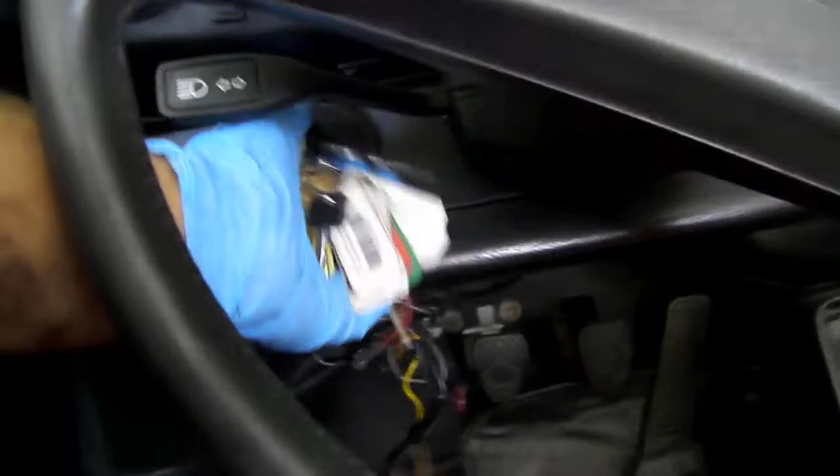So first things first, I'll show you exactly what the issue is in this car. So you go over here, go to the key in the ignition, you turn it, fuel pump, everything comes on, nothing. Again, nothing whatsoever. The starter is not clicking, the starter is not turning, there's nothing going on at all.

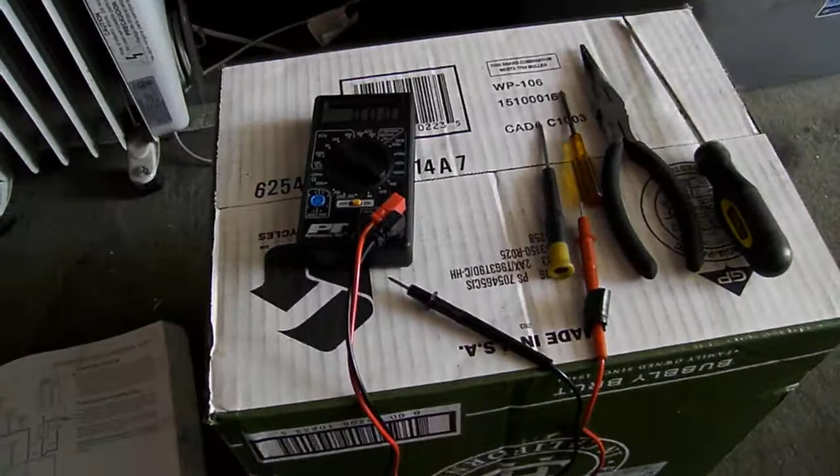So the first step is going over to my little workbench that I created out of a wine box. Go to some basic tools here. Most important one for this job is a multimeter. You could pick one of these up for 20 or 30 bucks at your local auto parts store. Doesn't need to be too fancy. Assortment of screwdrivers, just a few flatheads, pliers in case you need to test the ignition switch or whatever, just for ease. Get an extra strong finger in there.

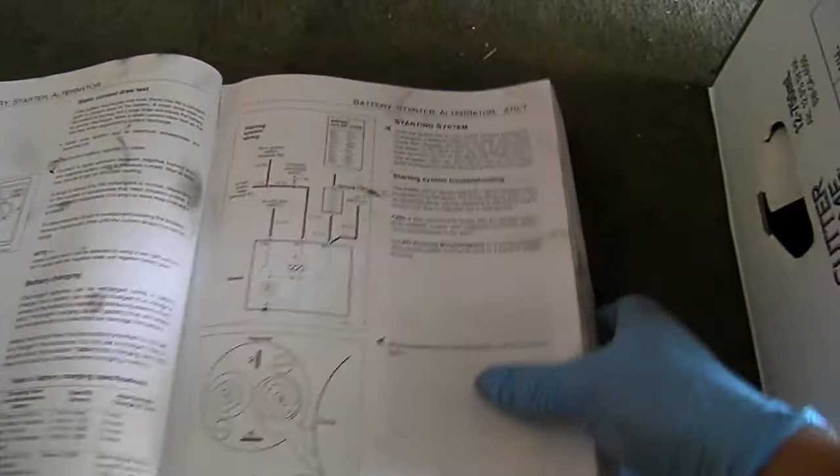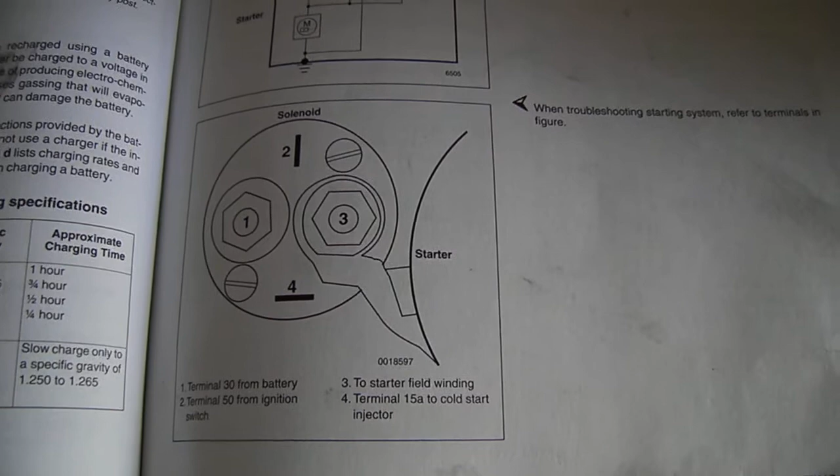And of course, if you do have an older Porsche, the Bentley 911 SC repair manual, which you can just get on eBay. Pretty straightforward. The battery, charging system, starter, it's all in section 270. This is specifically on page 270-7. You can see a schematic of the wiring system here. These are the terminal locations on the starter. Super straightforward, super easy, super basic.

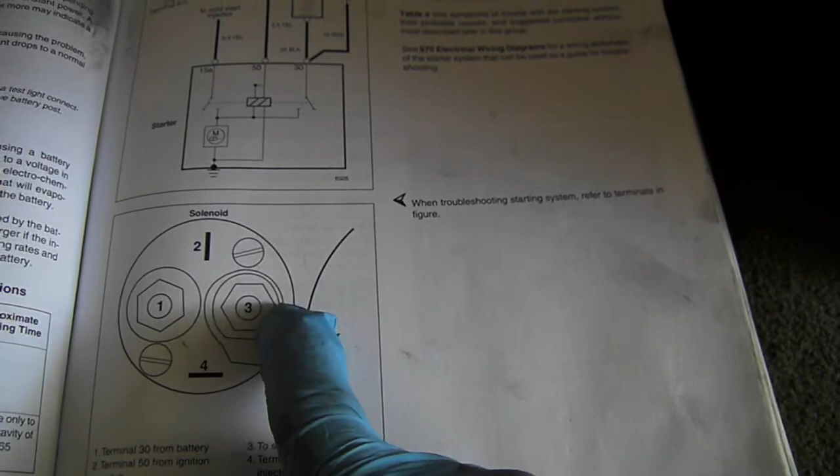Number one, this is as if you're actually looking up at the starter from underneath the car. Number one is your power. You're gonna have power full time there, or you should have. Number 3, next big one at your 3 o'clock position. That one is your starter winding. I don't believe that there are any wires connected onto here. That just transmits power from the solenoid to the starter, makes it turn and start the car.

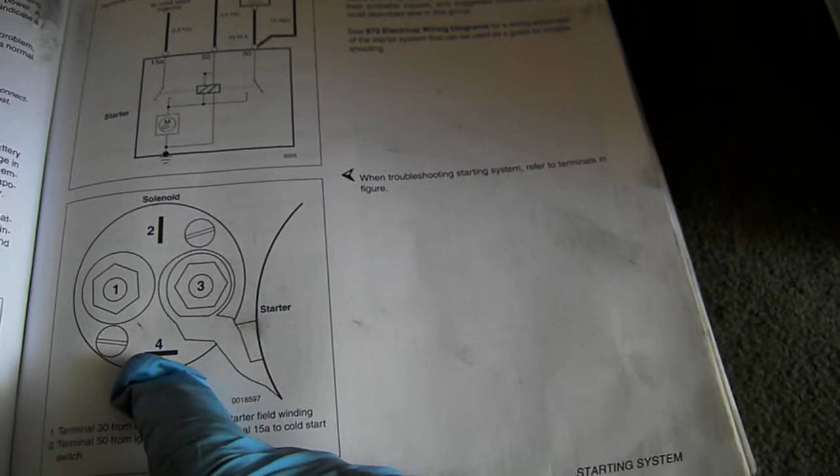Number 4 is for the cold start valve. The car should be able to start without that, but it just aids in opening up the cold start valve for, I believe it's additional fuel to go into the combustion chamber when the car is cold.

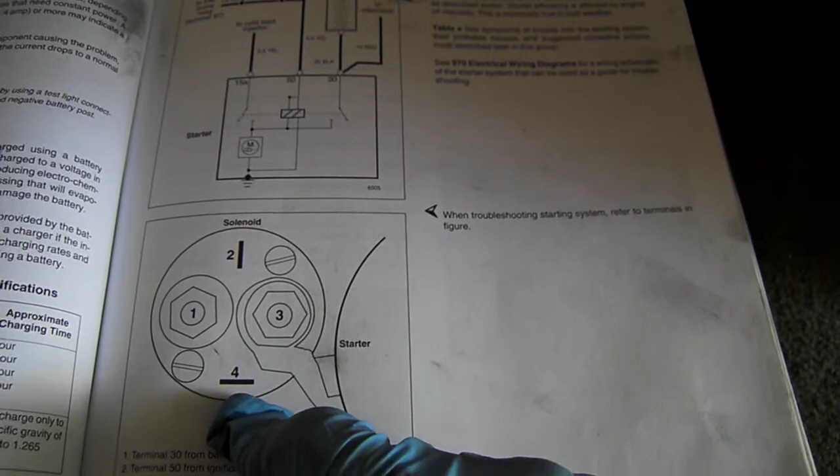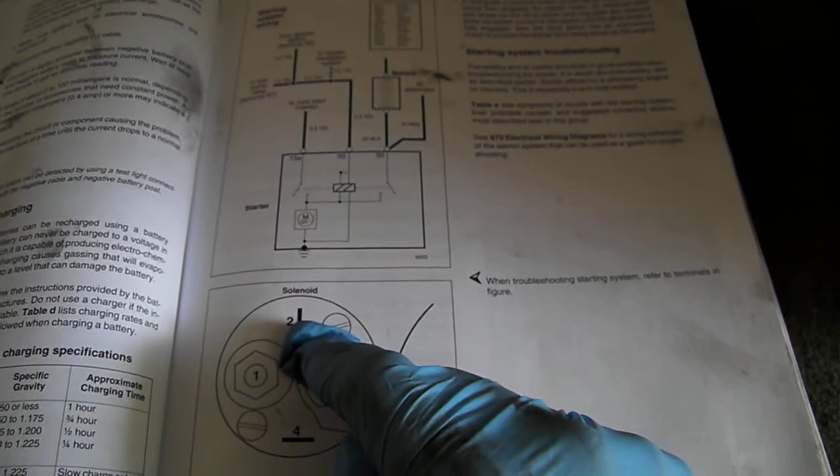Number 2, and this is the culprit in this case, the solenoid. The solenoid wire mounts to the 12 o'clock position up at the very top of the starter. This one should get power when you turn the key to that final start position. In this case, this car is receiving power at number 2, but nothing's happening, so it most likely is the solenoid. Anyways, down here you can see exactly what these wires are called. We have the number 1, the big one, terminal 30 from the battery.

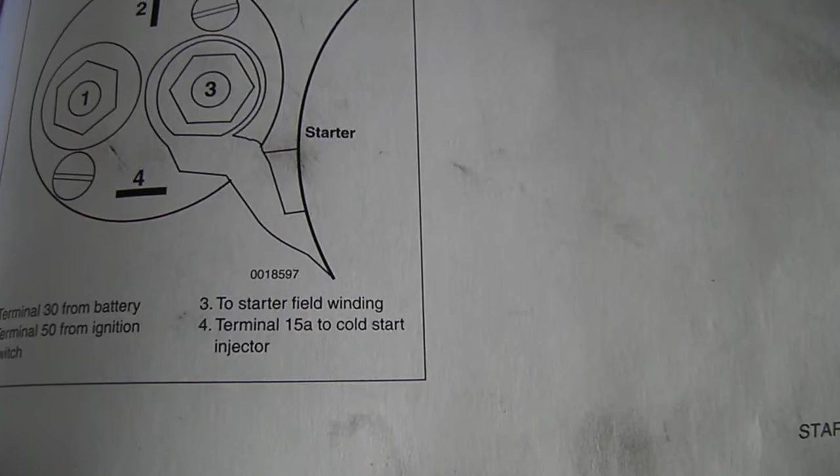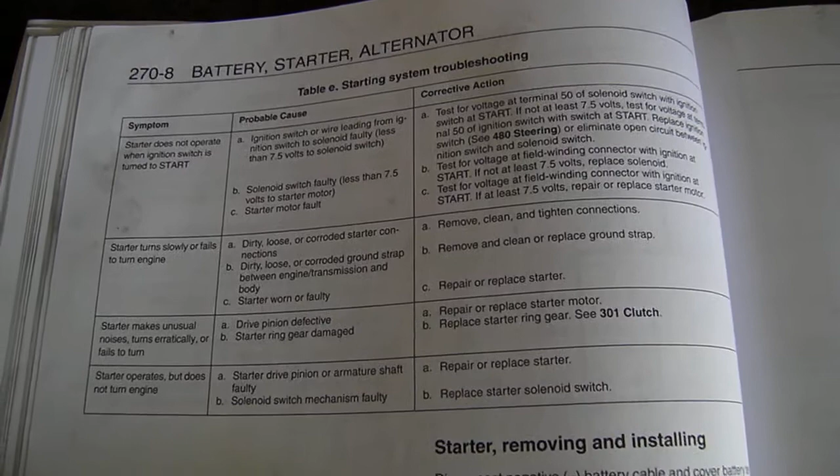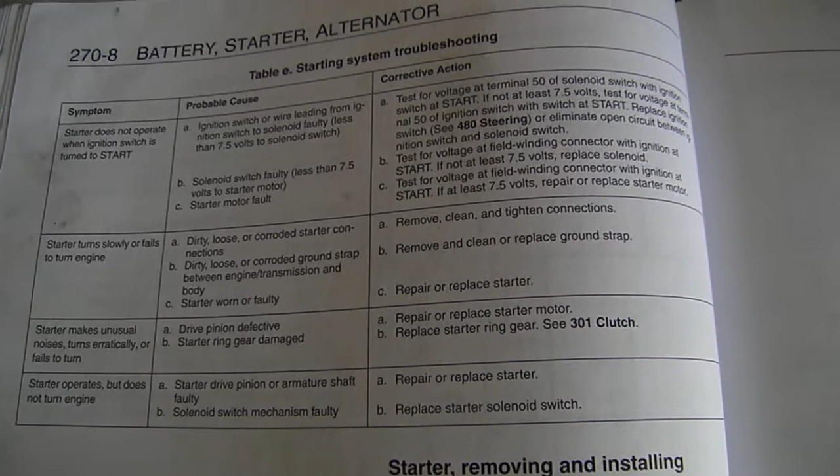Number 2, which is the solenoid, goes from the ignition switch, which I'll show you in a second. Number 4 is the cold start valve. Next page, and this is super helpful. I went through this little guide yesterday. Basically what happens, what are some common issues in terms of starting the car, what's happening, what's not happening, just a little troubleshoot guide, where to check. And it's all pretty straightforward once you know the locations of the different components and the different wires.

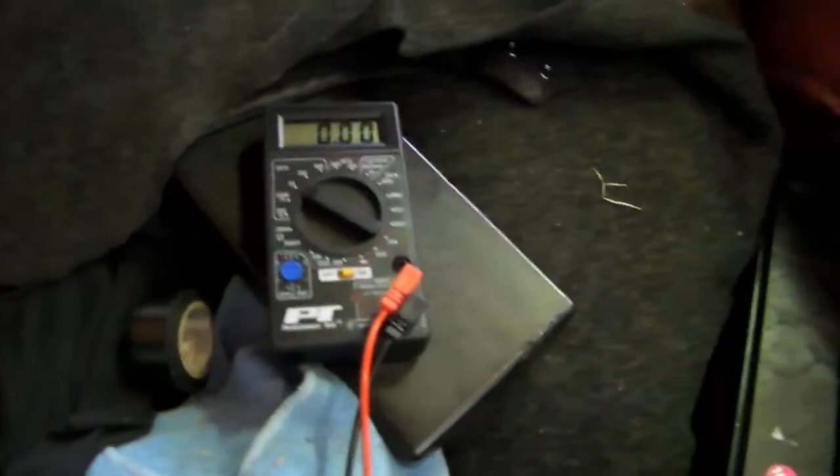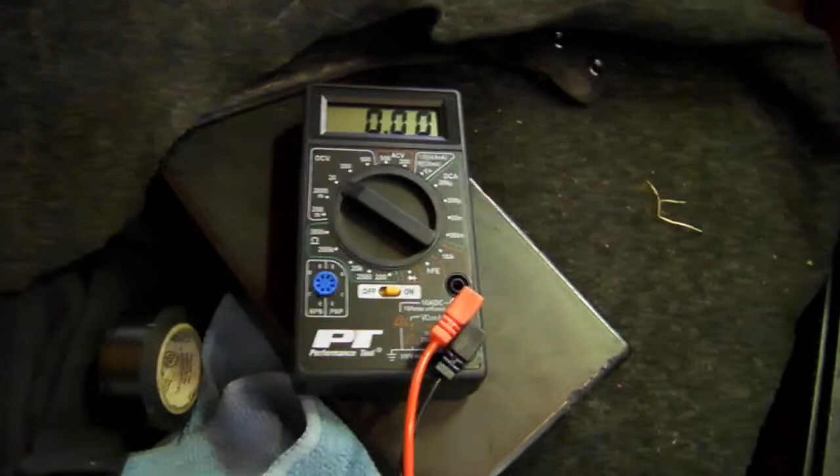So, next thing I'm going to do is make sure that the car has power. Take my trusty multimeter. Take it over here. This is the luggage compartment where the battery is located. Obviously a lot different in many other cars. Now, first thing, turn your multimeter on. I set mine to 20 DC volts, which is plenty. It just means that this will measure up to 20 volts. It's a 12 volt system, so that's plenty.

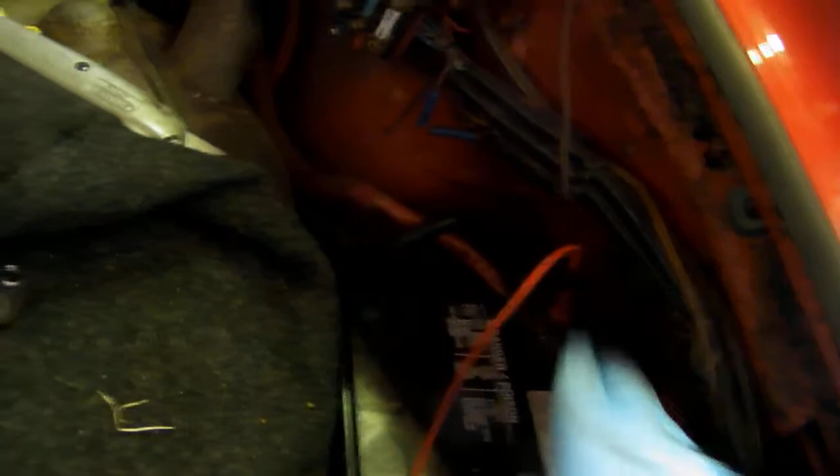Let's connect the first terminal to the positive side of the battery. Make sure it gets a good connection. Boom, done. Second, going to ground, done. And, okay. It is getting 12.31 volts, so that's a pretty good charge, probably 70% charged. Should be plenty to start the car though, and this car's been sitting for a couple weeks. I just haven't had the time to get to this, but that checks out, 12.3 volts. So we do have power. We know that the car has plenty.

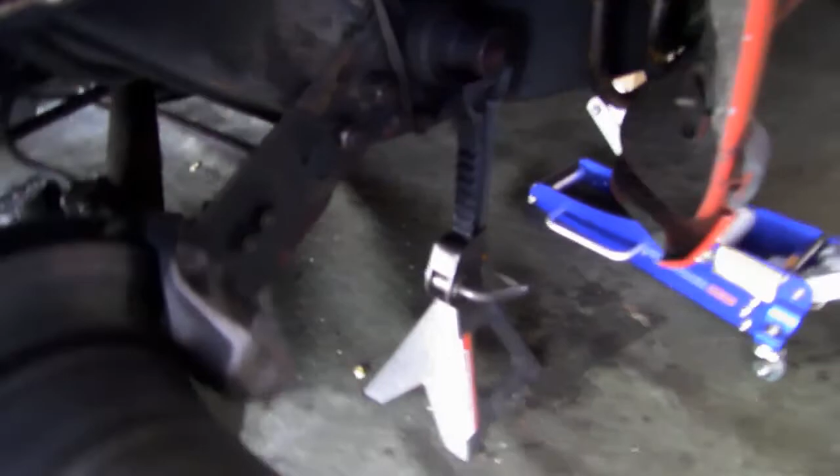Next thing I want to do, let's go back to the starter itself. Easiest way, at least for me, is to jack up the car, take off the rear wheel. Make sure that you're using a good hydraulic jack. Make sure you're using jack stands in case the hydraulics fail. I have mine right under there, under the torsion bar cover. So, crawling under here, I'm going to bring my multimeter right there, slide it under the car. And I do apologize for the lack of light, lack of space, but it is very difficult to work this camera and work at the same time.

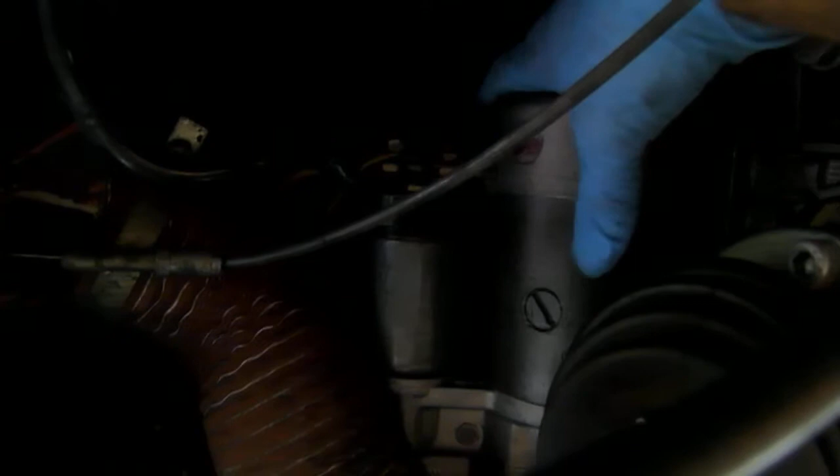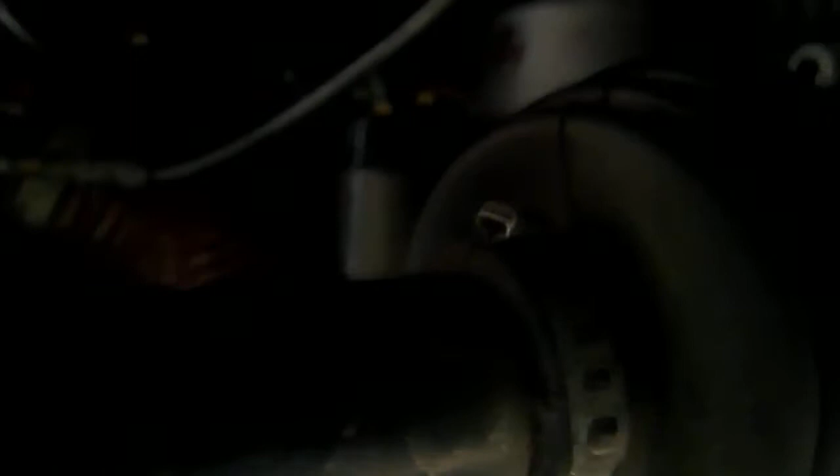So there's the starter up there, right above the axle. Again, pretty straightforward system. You have here the body of your main starter, just a dumb thing with no electronics on it whatsoever. Right next to it is the starter solenoid. That's the brains of the operation, makes this thing spin, turn the engine. Alright, so I'll try to get a good angle here. Hold on. Let's see how I can turn this. This might be the best you're going to get, unfortunately, but you can kind of see my hand.

This big black wire is the power supply, mounts onto the 9 o'clock side of the solenoid. This guy should have power full time, full 12 volts. Right across from it is the starter winding. I don't believe any wires are connected onto there. I could be wrong, but that one just activates when you turn the key. Power goes through, actually, this wire here at the very top. There's this orange, sort of orange and yellow wire. I took it off just to test, but that goes at the 12 o'clock side of the solenoid, if you're looking straight up at it. So, again, super simple. Just a little spade connector.

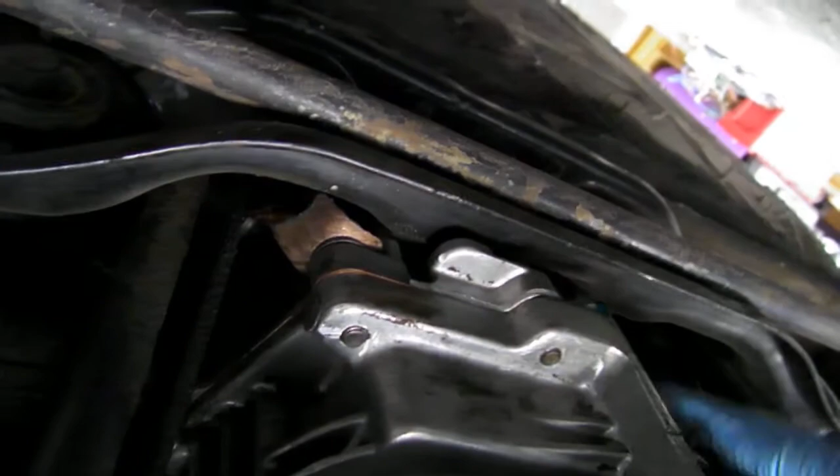And then down below, this is the bottom wire. This is your 6 o'clock side of the starter. That's for the cold start valve, little yellow and blue wire. So the first thing I'm going to test is to see if I have power to the solenoid itself when I turn the key. And that's activated by this wire here. All you need to do is take your multimeter and stick the red terminal into this wire spade, one side there. The other terminal of the multimeter, the ground terminal, you're going to find a good ground for the car. In this case, I like to use the ground strap located on the transmission, which isn't too far. And yes, I do know I have a little transmission oil leak there. So the ground, I'm just going to find a good spot to stick it.

And my connectors are small enough that they'll just stick right in there. So you have one there, and then again, take your other terminal, this one here, on your multimeter, and just find that solenoid wire, the one that goes on 12 o'clock, and then just put this one in there. This is where an assistant comes in handy. If you have somebody to turn the key, definitely have them do that.

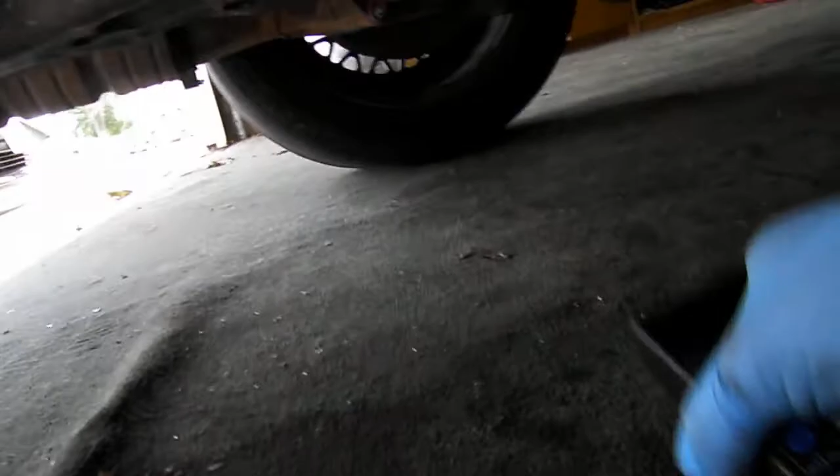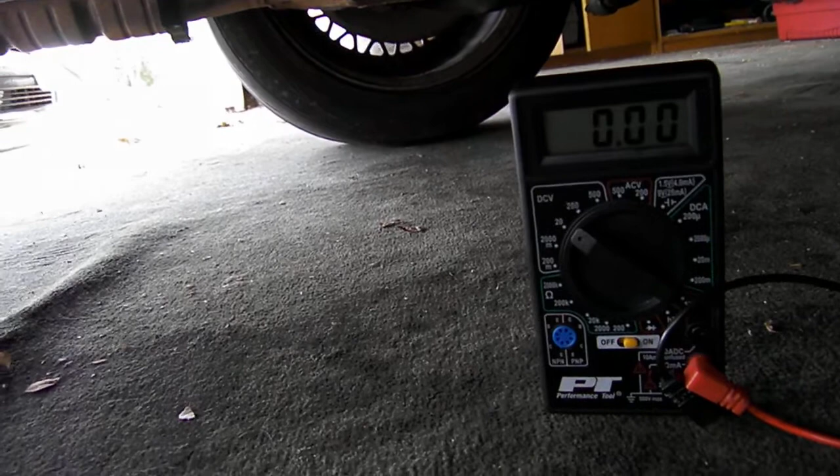In my case, what I did was I actually just placed my multimeter standing up like this. Since I don't have an assistant, I put my cell phone right here and just took a video of what's happening when I turn the key. So ultimately, when you turn the key with the spades in place, everything's all set. Set it to volts. Then go back, or have your assistant go back to the car. Turn the key to the run position or the start position, and you should see that spike up.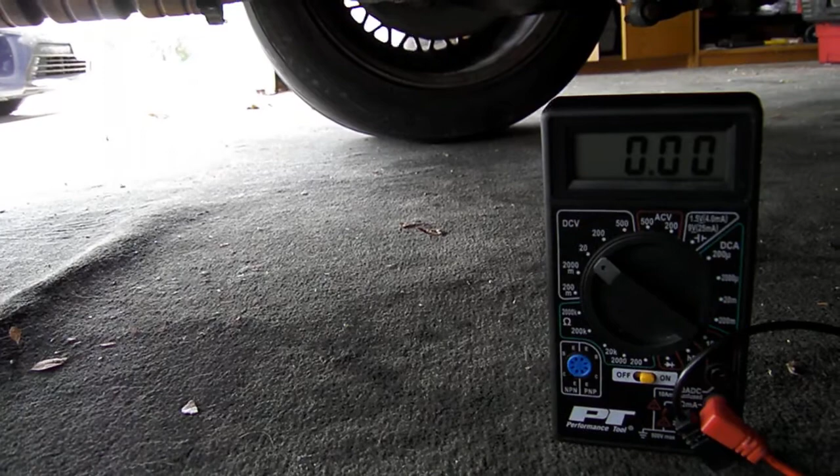The Bentley manual says anything above 7.5 volts is fine. I'm reading about 11, so perfect. I am getting full power. There is power going to the solenoid, so that's great. If you're not getting power, and again, this should only have power in the start position, you might have a short. You might have your power not going to the solenoid.

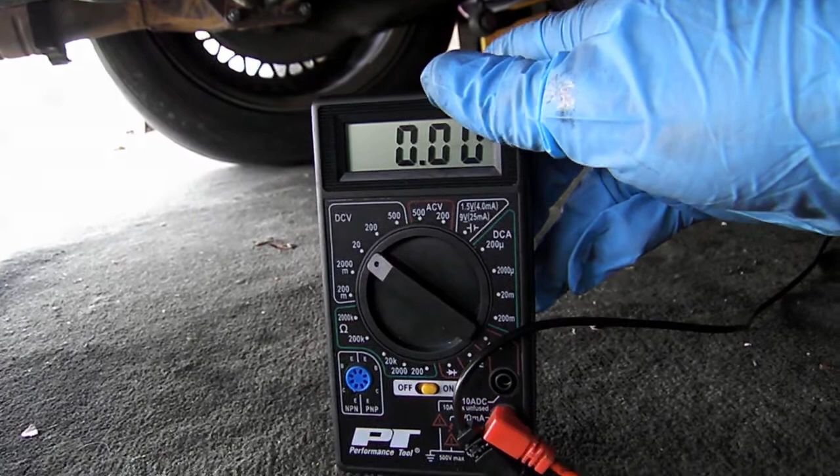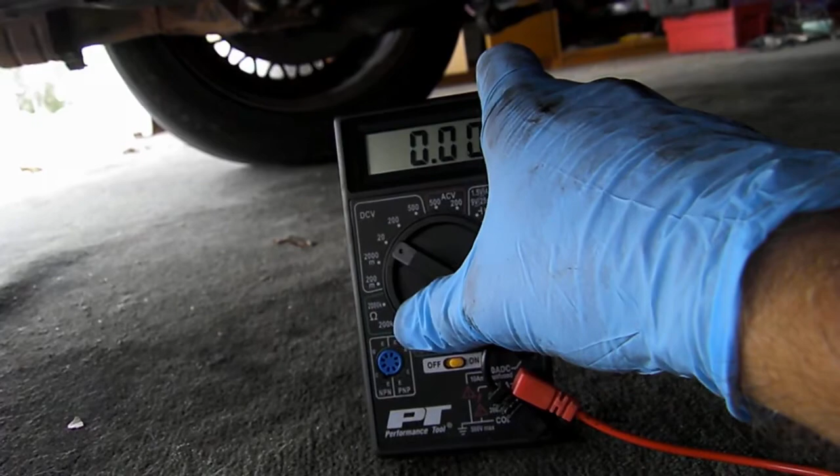You want to check the wiring, and then just go ahead and set it to ohms, and you can check for resistance. The normal setting is if you're getting resistance, then that should only happen in the start position. If you're not getting any resistance, that's totally normal for not being in the start position. But if it's in the start position and you get no resistance, that's an issue. That's something completely different. You're going to have to track that wire essentially all the way back to where it goes into the luggage compartment and test that. So, we have power there.

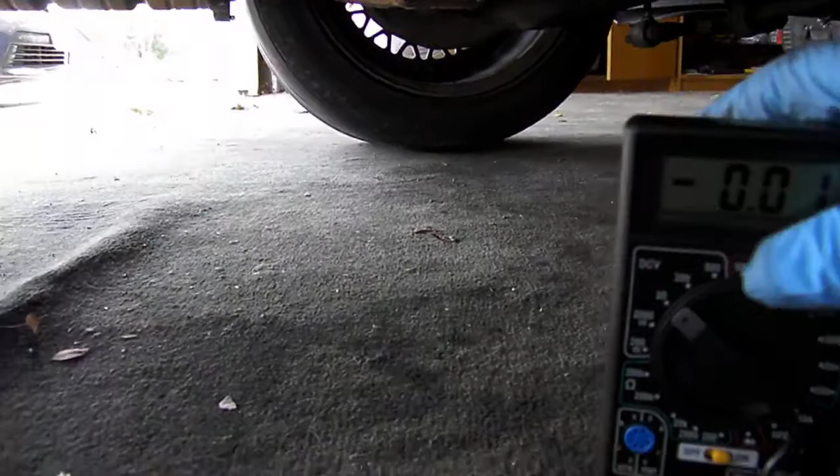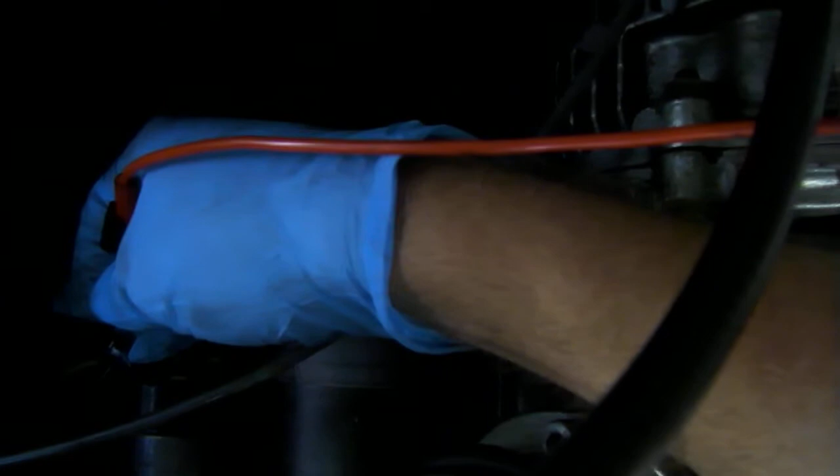Next, what you want to do is just go to the other terminal, the big one that's located at 9 o'clock, where this big black power wire connects. Just touch the terminal. Obviously you have the other black cable from your multimeter onto a ground. If you touch that, you should be getting 11-12 volts up to the starter, because that's going to be hot full time. So in this case, I have full power going onto my big black connector. I have full power going into my solenoid, so I know that's fine.

Now, what you can also do, if you're suspecting it's your starter that's bad, is just grab a well-insulated screwdriver, like so, with the rubber handle. What you want to do is just touch the two terminals: touch the starter winding at 3 o'clock, and touch the big power terminal over at 9 o'clock, and see if the motor runs. That essentially bypasses the solenoid. So let's see how I can finagle this in there. This might take a minute because I don't really have a great screwdriver for this.

Oh, yeah, you can see that sparked, and you can also hear the motor running. So see if I can get that again. I really should get a better screwdriver for this. And again, it has to be insulated, or else you're going to get shocked. There you go. So I just touched essentially the two big terminals.

Again, I'm getting full power onto that first terminal, the big black power terminal from the battery. I'm getting power there. I'm getting power to my solenoid, but the solenoid's not activating, so that means the solenoid is bad and needs to be replaced. And again, the solenoid is the smaller cylindrical piece with all the wiring connected to it. So that's sort of a quick diagnosis. And again, if you're not getting power to your starter, that's an issue. If you're not getting power to your solenoid, that's an issue.

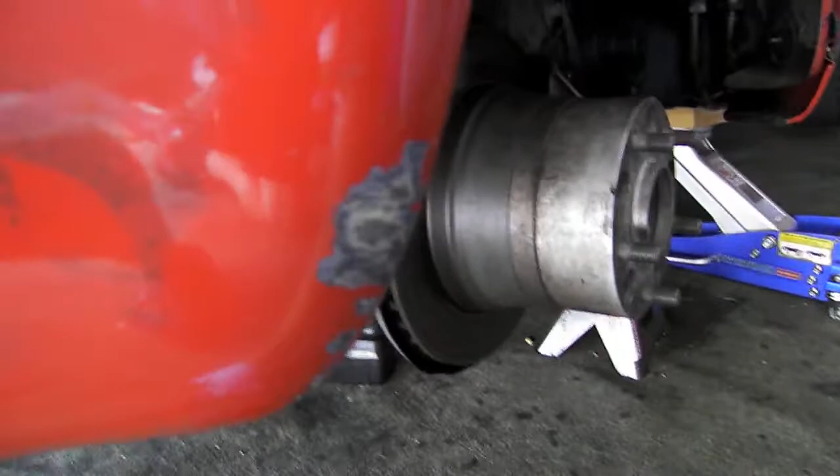In my next video, I'll show you how to look at the switch, and if you're having issues with the switch, how to resolve that. So anyways, hope that helped a little bit, and stay tuned for the next video on the ignition switch.